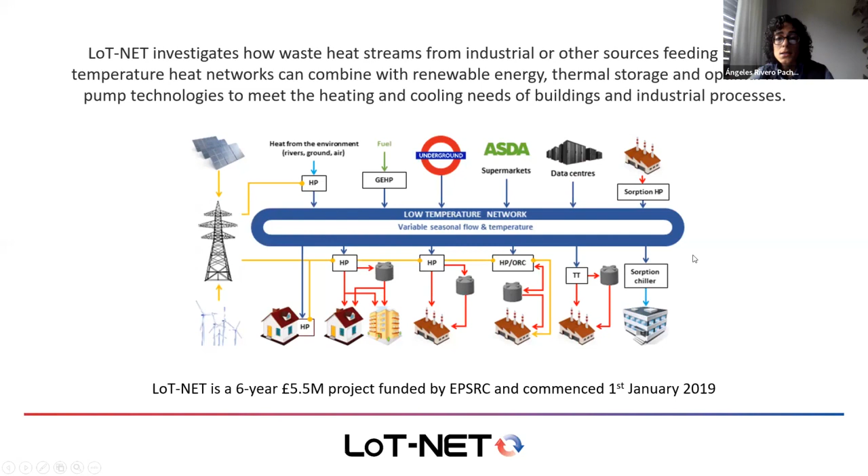Sources include, for example, London Underground, commercial supermarkets, industry, and data centers. We want to integrate all that waste heat, and we want to use renewable energies as well. We also use heat from the environment, such as rivers, ground, air, and lakes. We want to provide heating and cooling for domestic or industrial applications, incorporating technologies such as heat pumps, thermal heat storage like latent heat or thermochemical storage, and thermal transformers and organic Rankine cycles.

It's quite a big project, and we have 4 universities working on it. At Warwick, we have the School of Engineering, with expertise in heat pump technologies, sorption materials, and energy transformation. We also have the Business School, which helps with business cases, and looks into behavioral change when adopting these technologies.

We have Loughborough, with the Center for Renewable Energy Systems, which looks at renewable energies, storage systems, and design of energy efficient products. They also have the design school, which provides consumer interaction research and consumer behavior studies to help implement these new technologies. Then we have Ulster University.

Ulster's expertise is vapor compression heat pumps, organic Rankine cycles, and demand side management. And we have London South Bank University, whose main expertise is cooling. They also have been working recently in smart local energy systems, and they run the network SIRACH, which is a dissemination network. I'll talk about it in the next slide.

As part of LoT-NET, we have 2 dissemination networks. We have the Knowledge Exchange Network for early career researchers, where we organize seminars, webinars, and try to establish links with sister projects. We also have SIRACH, which is part of the Institute of Refrigeration, focused on sustainable innovation in refrigeration, air conditioning, and heat pumps.

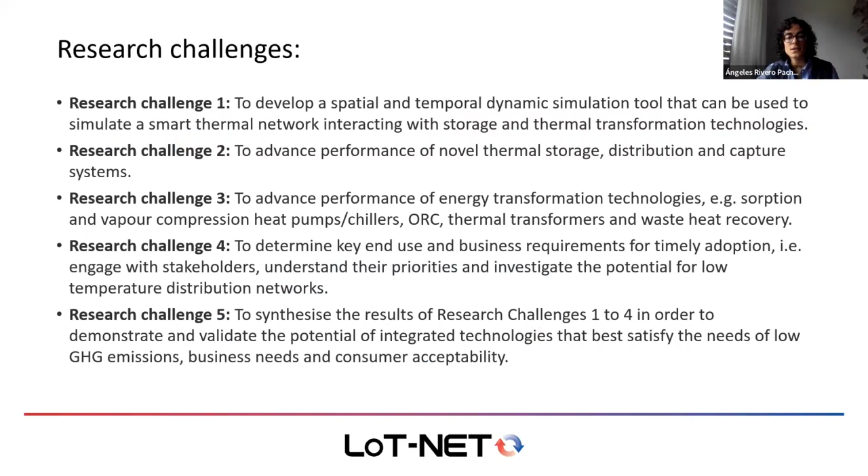For information about LoT-NET, after my presentation, if you want to contact any of the academics, see publications, papers, conference papers, or project updates, please go to the website. The research challenges that LoT-NET has, we have 5 of them, so I'm going to explain them one by one.

So the first one is to develop a spatial and temporal dynamic simulation that is going to be modeling dwellings, and it's going to be modeling how renewable energies can be integrated in order to obtain a net zero energy system. This has been done by Loughborough, and I'm going to talk a bit more in the next slides.

Then we have advanced performance of novel thermal storage, distribution, and capture. So for example, here we have distribution medium. This is work that I did in the past, where I looked into thermochemical heat distribution networks.

We collaborated with London South Bank in order to maybe integrate an ambient loop of this material into an energy system. Loughborough has been doing research in storage, latent heat, thermochemical, and London South Bank has been looking into potential sources of waste heat.

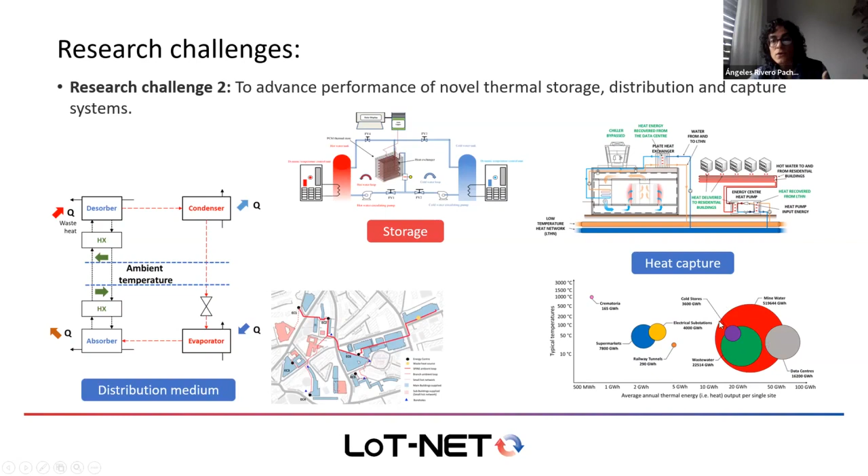How to capture waste heat, and the amount that could be available from these different sources. Research challenge 3 is to advance performance of energy transformation technologies.

So we have Ulster University, they've been doing a lot of work in vapor compression, heat pumps, and organic Rankine cycles for high temperatures and as well lower temperatures but higher COPs. And at Warwick here, we've been working with thermal transformers.

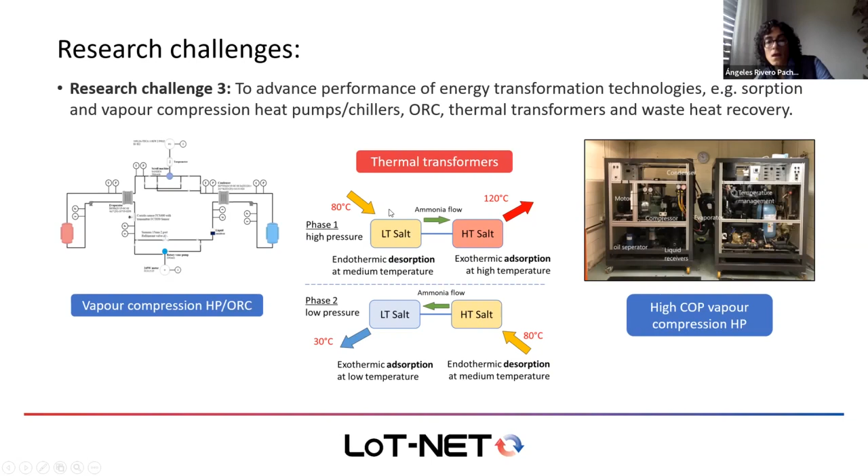The 4th research challenge has been looking into the consumers, how they will adopt these new technologies, and as well the business requirements for the adoption of these new technologies. The 5th challenge is to integrate all the previous work, and this is going to be done towards the end of the project.

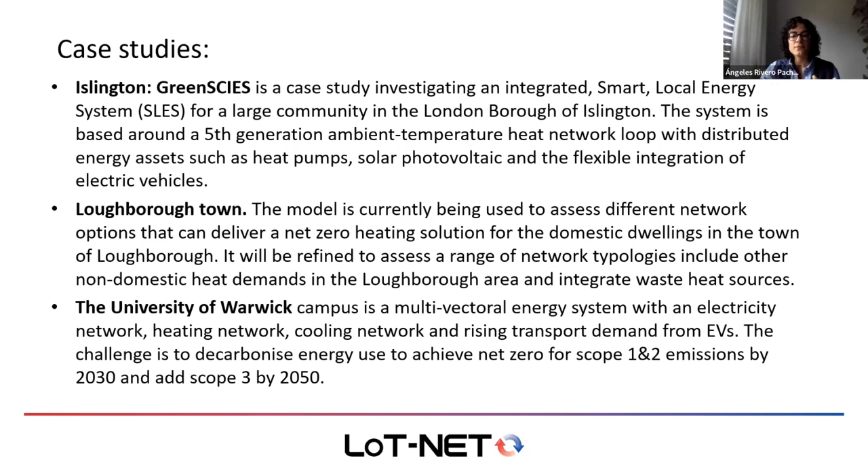So in order to use all these developments, technologies, and modeling in real life, we've been developing case studies. We have 3. One of them is the one I'm going to talk about, the one I'm working on. But the first one is related to London South Bank in London.

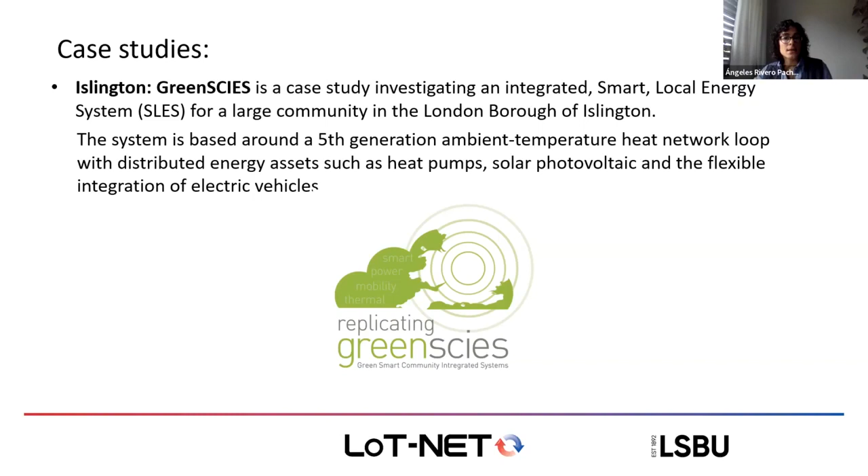They've been working with a smart local energy system in the borough of Islington. The project is called GreenSCIES. Basically they're working with the 5th generation ambient temperature heat network loop.

They want to integrate in this network waste heat coming from the London Underground, waste heat coming from data centers around the city, and boreholes that connect to the London aquifer. They integrate as well solar energy, renewable energy, PV, and electrical vehicles.

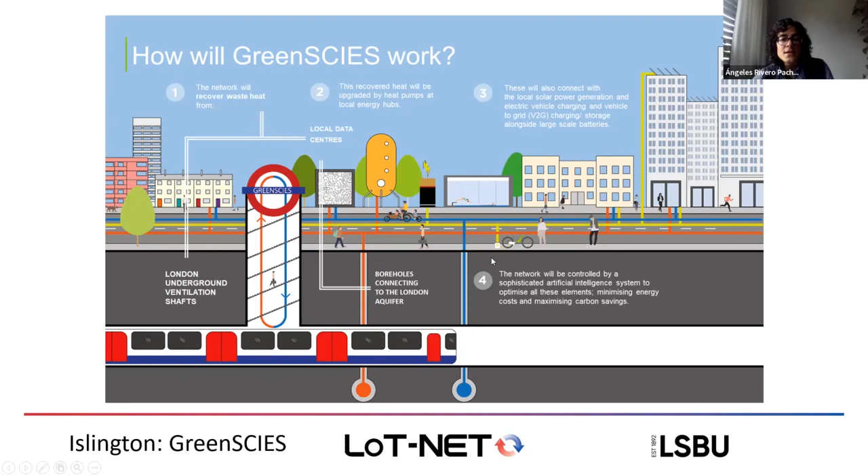One of their schemes is the New River scheme. As I mentioned, they are integrating cooling, heating, mobility, and power, taking into account heat pumps and electrical vehicles. They are measuring the benefits as carbon savings and as running costs, and they are developing a control system.

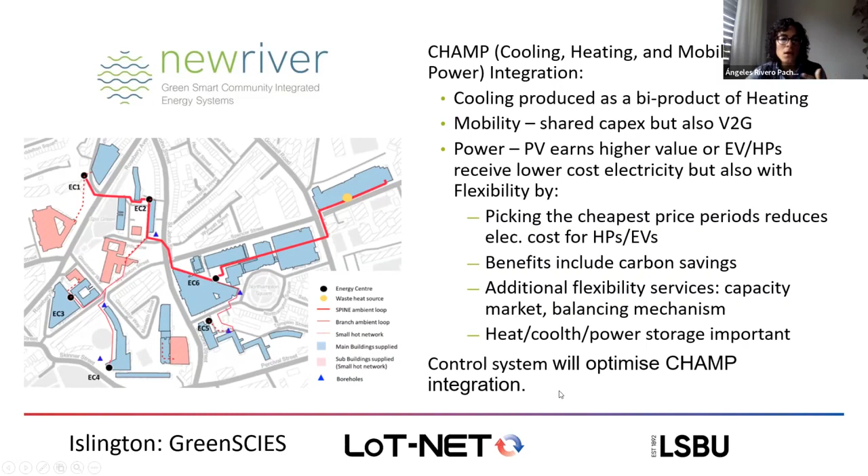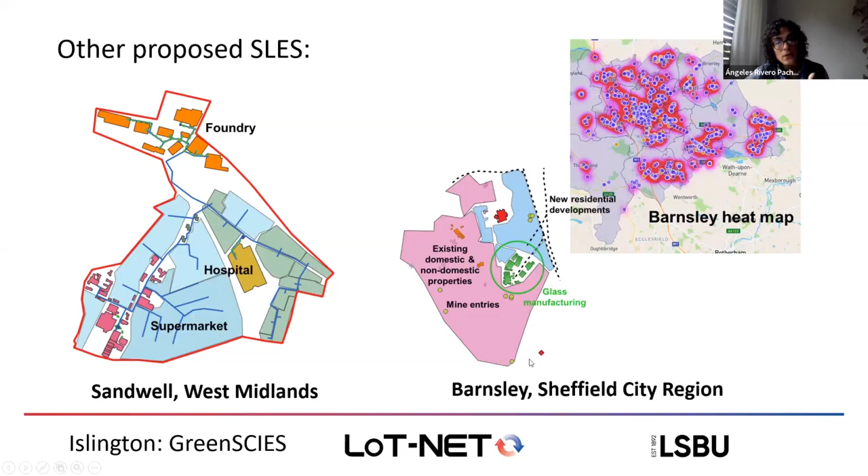I think they're going to be using artificial intelligence to have everything under control. They are working as well to expand and have some other smart local energy systems. One could be developed in Sandwell, West Midlands, and another one in Barnsley in Sheffield City.

The second case study corresponds to Loughborough Town. That model simulation I presented earlier, which they are developing at Loughborough Uni, they want to use it to predict a net zero heating provision for the town of Loughborough.

Loughborough Town has 23,000 dwellings of various building types, and a population of 67,000 people.

So they look at different populations in many towns in the UK, and basically what they want to do is see what the sizes of the towns are and see how this tool can be implemented in other towns, to see if it can be used to achieve net zero.

If this tool is used in other towns, this can reach 32.6 million people in the UK, or England and Wales. Also, because of the size Loughborough has, it can be divided into regions.

Different regions can be analyzed differently and maybe then integrated together. So basically, this tool can be scalable to different sizes.

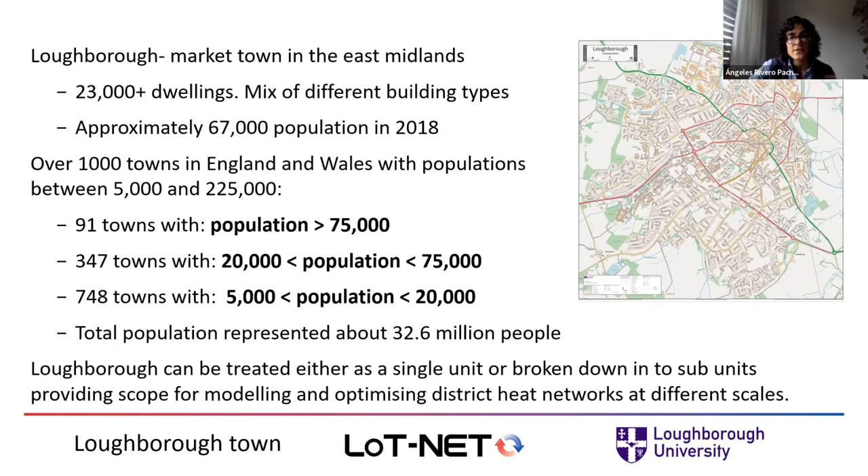As I mentioned earlier, they've been integrating renewable energies such as photovoltaics and wind, and they have thermal stores of different sizes and temperatures. So all these variables are going to be explored.

I guess it's an ongoing process. The modeling will be refined for greater temporal and spatial resolution, and different operational strategies are going to be developed as well.

They're going to integrate more information regarding the buildings, the thermal mass, the fabrics of the buildings, the UA values, as well as network operation temperatures, which may be constant or variable depending on the time of year and the waste heat sources available in the area. That's another thing that needs to be assessed.

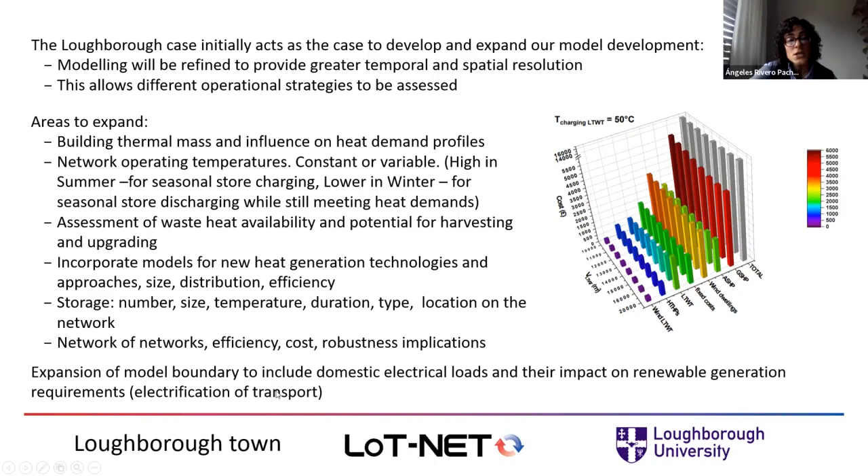New heat generation technologies being developed at the moment can be integrated. We have a model of these new technologies that can be integrated into the simulation tool. Storage, depending on where it goes, its size, and type, is going to be assessed for costs and CO2 emission reductions. Electrification of transport is also going to be added in the future.

The third case study is the University of Warwick one. We're looking at the Warwick campus and using it to analyze and implement new technologies. We want to achieve net zero, and we're looking at replacing the heat provision we currently have, which is done by combined heat and power engines and boilers, with vapor compression heat pumps.

There are a few projects running in parallel at the moment. We have Energy 2020, which is a heat network delivery unit study, aiming to achieve low zero carbon heating across campus.

Then we have SmartSquare, which is the one I'm working on. We're working with building management companies to monitor the buildings better and include different operational strategies to reduce CO2 emissions and make it more energy efficient.

SmartSquare is an area of the campus, which I'll explain in the next slides. We want to make it a bit more smart and flexible. We can possibly detach it from the rest of the campus, and the decisions we take on how to operate it can be applied to this area of buildings to see how they work.

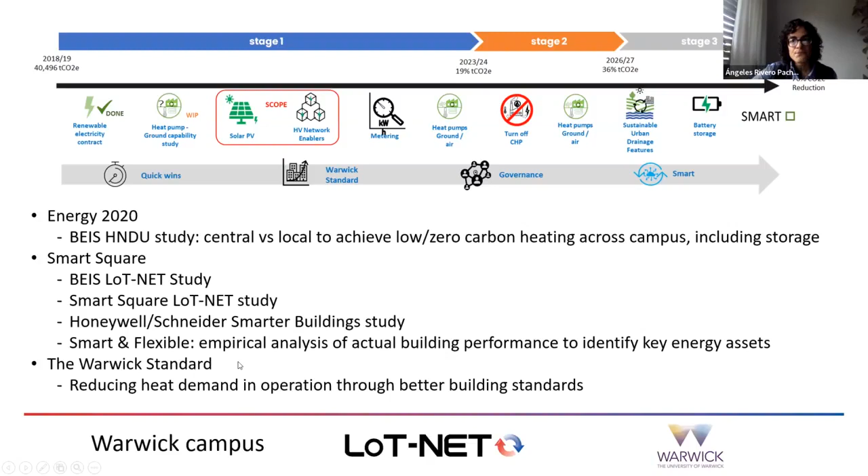This project is finalizing. We have funding from BEIS to run a heat network delivery unit, look at the whole campus, see what the consumption is, how we expect it to evolve in the next few years, and try to provide all the heat needed with vapor compression heat pumps—replacing, as I mentioned, the main energy center.

We have one energy center here in the middle of the campus, and another one outside of the campus. We want to electrify the heating, and we also take into account some solar renewable energy from PV. I think they should publish their results soon.

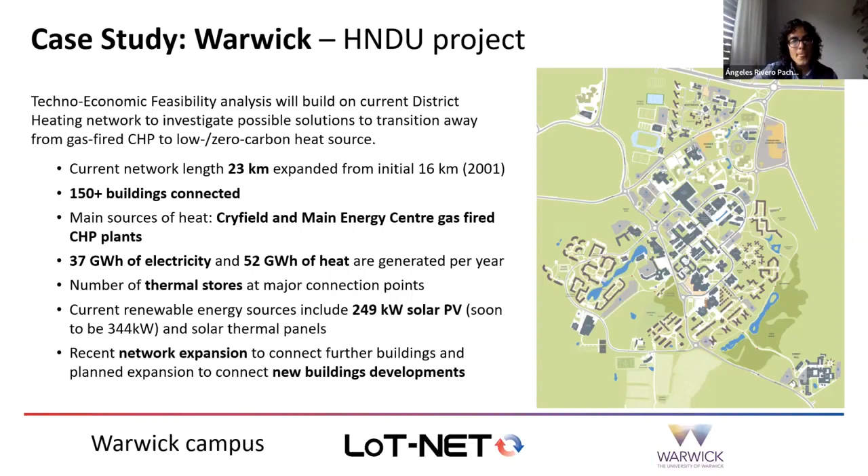That's one project, and then the next one is me, looking at SmartSquare. So what is a SmartSquare? This is the whole campus, and SmartSquare is these buildings in this area that are basically connected to the same line of the district heating network, representing around 10% of the campus energy consumption.

They are fairly new buildings—the oldest is maybe 30 years, the newest is 3 years old. The standard of the buildings is quite good, and they have good building management systems installed, so it's easy to monitor or collect energy data from them.

We want to see what we can do with this area, electrify the heating, and then probably expand to the rest of the campus, reducing cost and CO2 emissions.

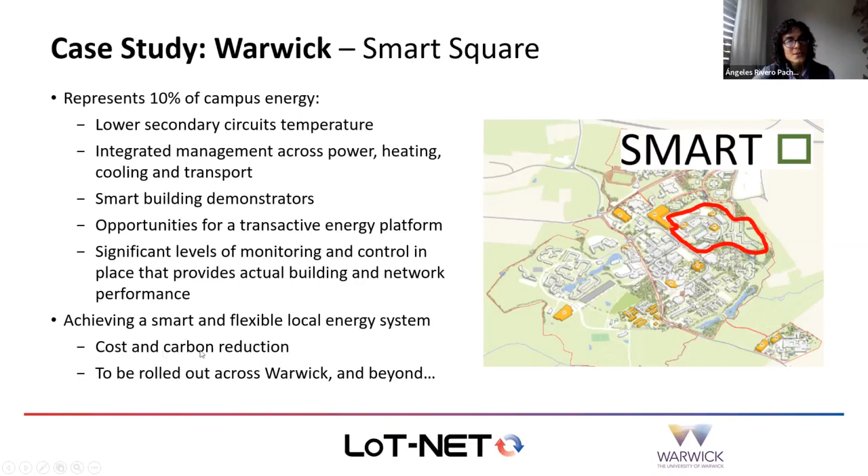The analysis I've been doing in SmartSquare is mainly technical and empirical, as I've been collecting data to understand how the buildings behave. The next step of my project will be to analyze heat pump options to decarbonize SmartSquare.

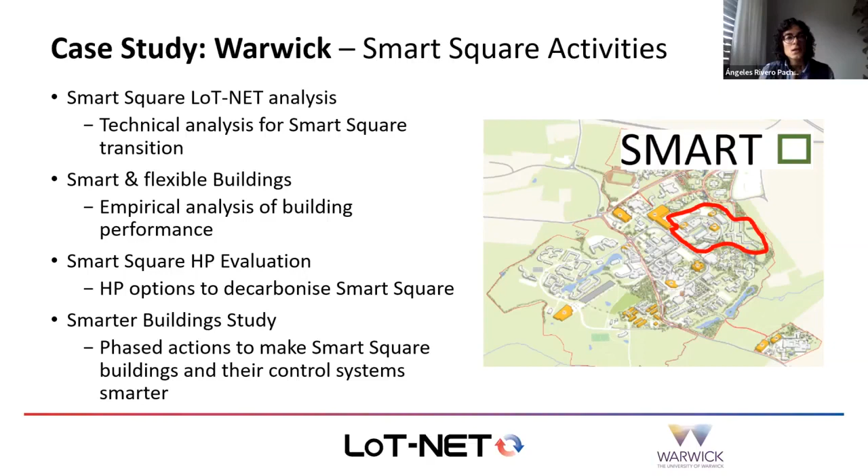In the meantime, we're going to start trying different things and see how the buildings react to them, in order to get to the final stage where we're happy with how the building is behaving. We think that we can now electrify the heat and it's going to have a good efficiency.

So this is SmartSquare. We have a mixture of different types of buildings. We're a university campus, so we have some residential buildings here, 3 residential buildings, and 3 car parks, but I'm not analyzing them as they don't have heating delivered to them. Then we have the orange star buildings, which are non-residential, mainly labs, teaching, and offices.

So there are 17 buildings. The oldest is around 30 years, and the youngest, the newest, is 2 or 3 years old.

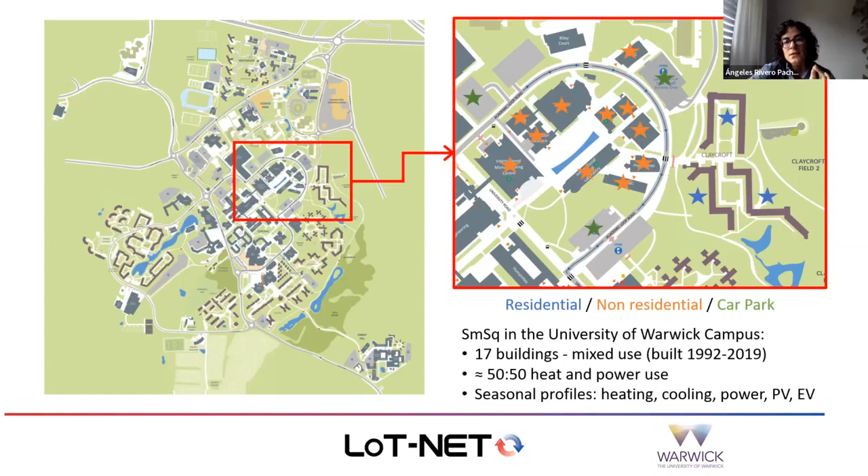I've been analyzing the power use, heating, cooling use, the production of PV, and also electrical vehicle consumption. So this is what I've been gathering: heating consumption, daily, hourly, PV production, cooling consumption, electricity consumption, gas consumption. We have some buildings being heated at the moment by gas, and very importantly, internal temperatures of the buildings.

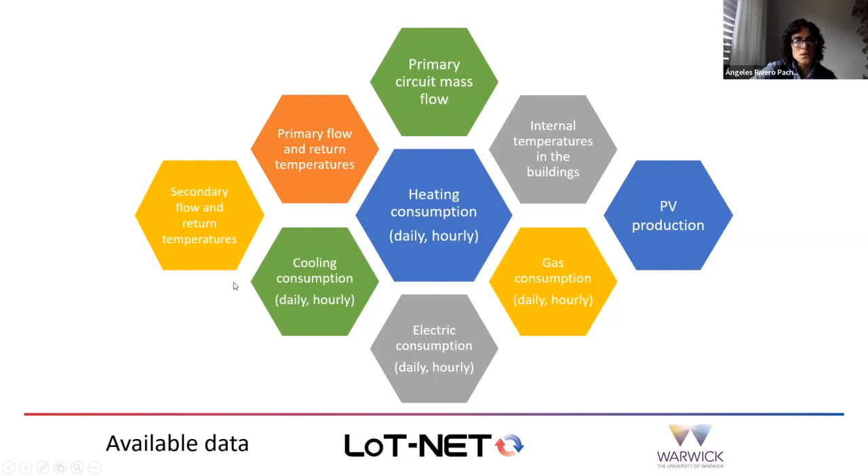We also measure the primary circuit mass flow, the temperatures of the primary network, the flow and return temperatures. Some of the buildings are connected directly to the network, and some others have secondary circuits in them, so we can measure those temperatures as well.

As I said earlier, it's more or less a 50-50 divide between electricity and heating consumption. We have one heat pump installed in one of the buildings, and the rest is just energy use in lighting, laboratory equipment, etc.

Most of the energy comes from CHP plants. We have some PV production, but it's really small.

When analyzing the heating consumption in the buildings, I had to differentiate between space heating and domestic hot water. So from now on I'm going to be focusing basically on space heating. Domestic hot water has to have a certain delivery temperature because of health and safety issues, so that can be provided by point of use heaters, and then we can leave space heating to heat pumps.

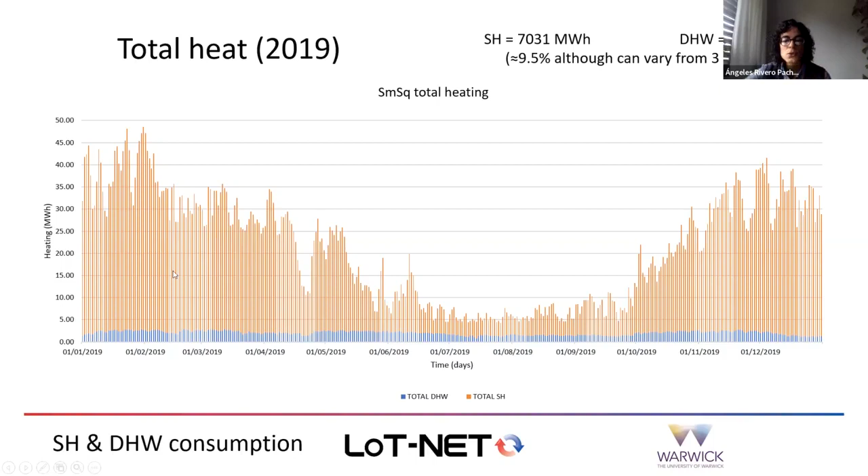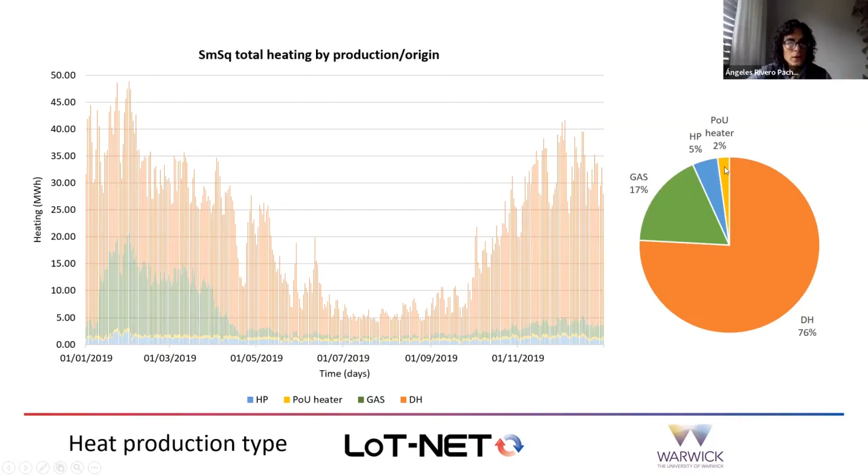This is how the provision looks like at the moment. Most, three-quarters of the heating comes from district heating. Some buildings use gas, one building uses a heat pump, and then point of use heaters provide the domestic hot water. This is how the district network looks like.

We have more than 150 buildings connected to it, but this is the part that interests me the most, the branch where the SmartSquare buildings are attached to. So we have a flow at the moment of between 75 and 85 degrees, and the return is between 50 and 65 degrees.

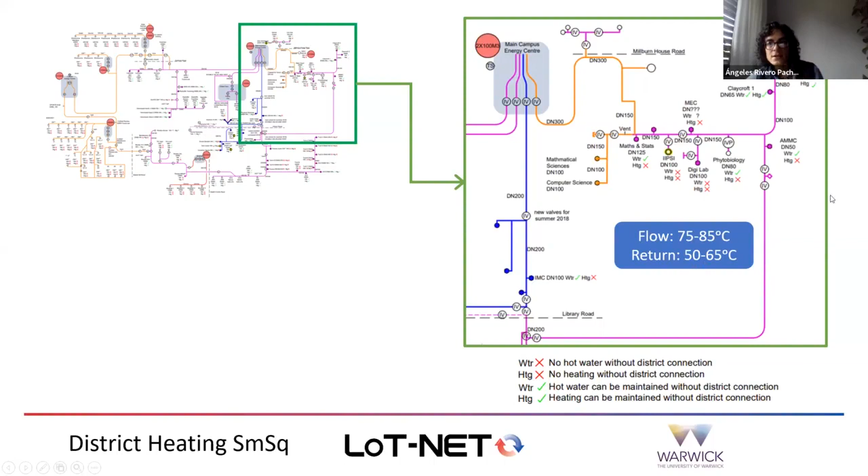First of all, I look at the buildings and what the performance is according to the CIBSE energy benchmark. We see that most of them are good, and in the yellow part some of them maybe need some work done on, and 2 of them didn't perform really well. But we need to be careful with the type of building we're working with.

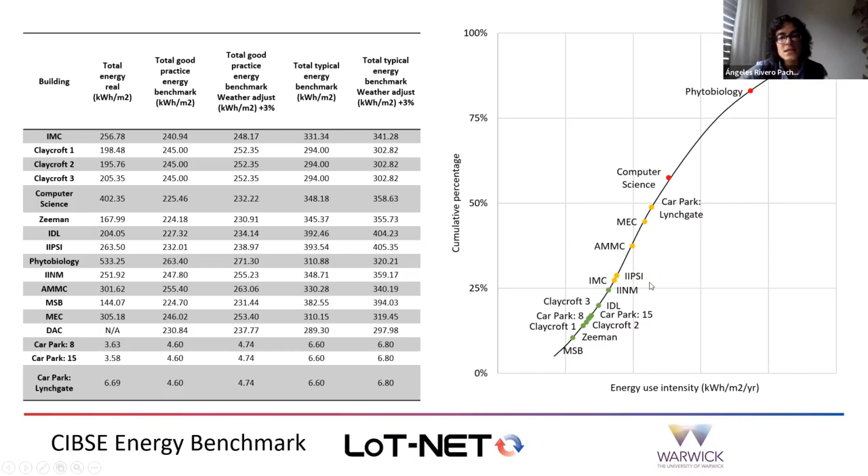For example, phytobiology, they run experiments - it's basically a big greenhouse, so we cannot really reduce much the energy they use because they need it to run experiments. But for the other buildings, maybe we can intervene and come up with energy efficient solutions for them.

I started collecting data and basically relating how the energy consumption of the buildings relates to outdoor temperatures, seeing if there are seasonal or daily profiles that can be useful in the analysis. So for example, some buildings during the weekends, they shut down and don't get any heating.

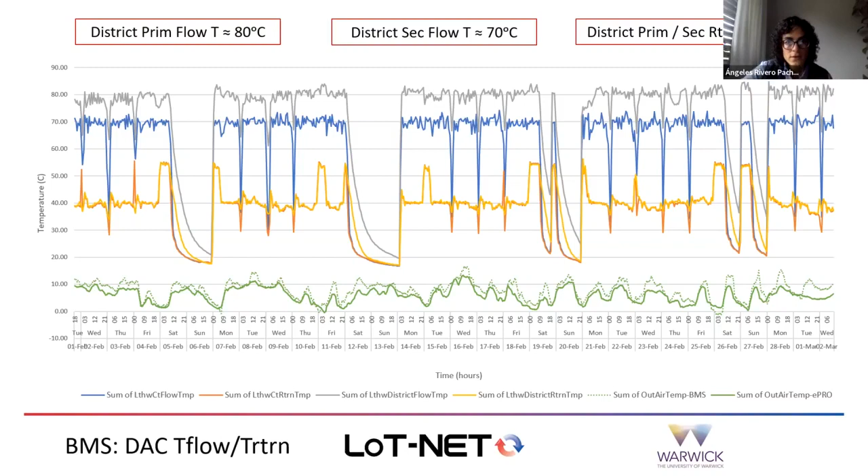This other type of data I've been gathering, as I said, is temperatures of the heat district network, primary and secondary circuits. I've also identified that in some cases the solar radiation plays an important part in the heating of the buildings. So I wrote a script and ran some simulations and could identify what I call the solar factor - the effect that solar radiation has on the heating of the buildings.

As we can see here, without the solar factor, the temperature line was quite far away from what was recorded in the building management system. So I'm quite happy with that - just a few tiny things I've been introducing in the model.

I've also modeled the UA value, the heat transmittance of the buildings, and the thermal mass of the buildings in order to model and simulate them. So here we can see what the temperature of the buildings are.

This is my simulation according to the gathered data of heat consumption in the buildings. As we can see, without the solar factor versus with the solar factor, it looks a bit more stable, around 21 degrees - that's the temperature we think the buildings are set to.

Then I've been liaising with Estates Department, and we have some intervention options that we want to try in the buildings. It's especially important now that we're starting the heating season. So we want to, first of all, reduce peaks, which means we probably need to increase the operational hours.

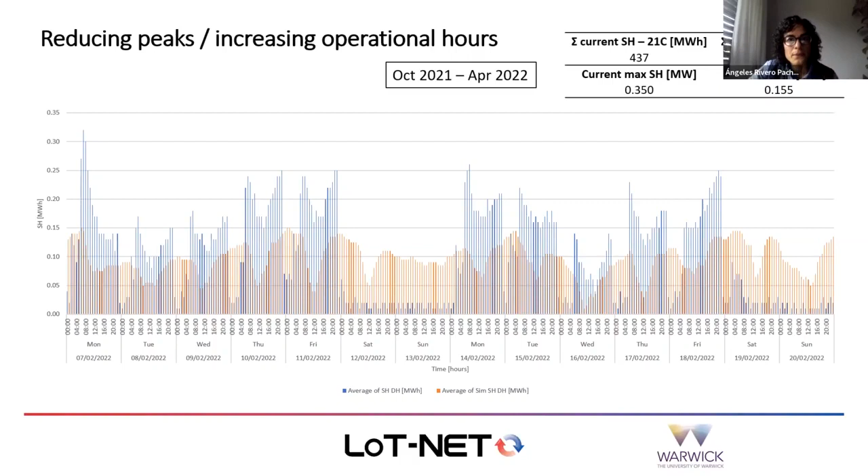I also ran 3 simulations. Instead of keeping the buildings at 21 degrees, what happens if we decrease the internal temperature of the buildings? I observed that there is a drop of 8% in energy consumption for each degree that we reduce the internal temperature of the buildings.

Another intervention we could do is reduce the secondary circuit temperature. So in this case, if I start reducing the temperature of the secondary circuit in the building, the power starts reducing, and there's a limit where the building can't cope with it. As we can see here, the internal temperature of the building starts dropping from 21 degrees - which was the set point - down below 19, and then it's not acceptable anymore.

So we can see here, the secondary flow temperature originally was 70 flow, 60 return. If I start dropping it, it reaches a point where it cannot cope. So it's good to analyze different buildings - for example, this other building copes really well. This is a newer building, and it's good to identify the different temperatures where the buildings can go.

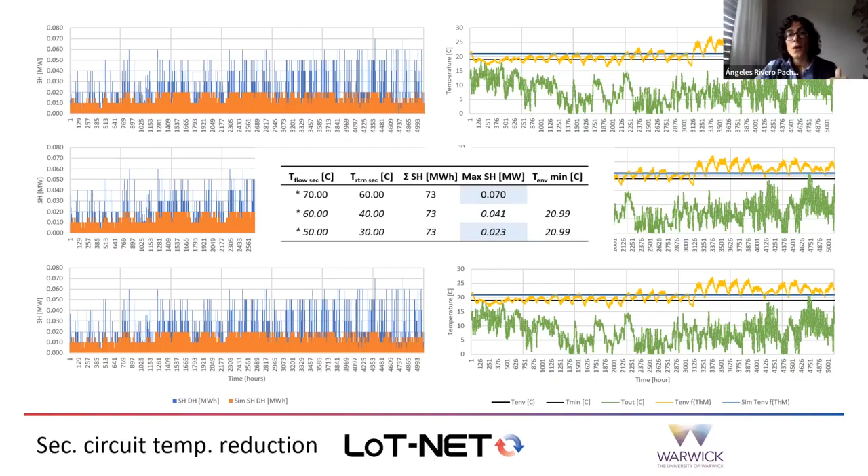And that's it for me. Basically, I'm going to run some experiments, varying different heating to the buildings, monitor those experiments, and then incorporate my findings into the modeling, in order to then introduce heat pumps and storage and develop an economical model for SmartSquare.